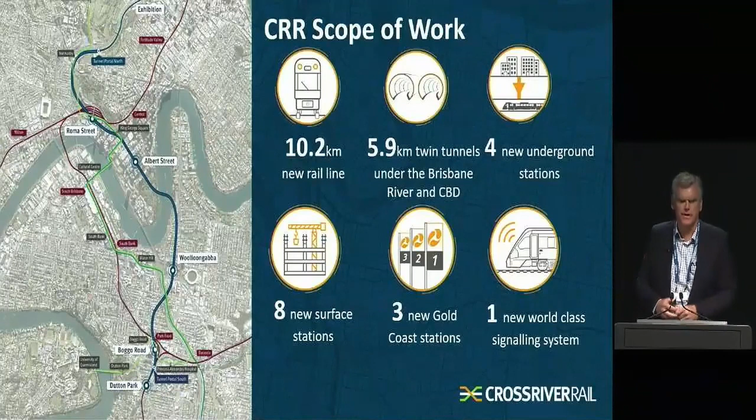Importantly, part of this work is the development of 5 precincts at Boggo Road, Woolloongabba, Albert Street, Roma Street and Exhibition. So a real uplift in opportunity across Brisbane and southeast Queensland.

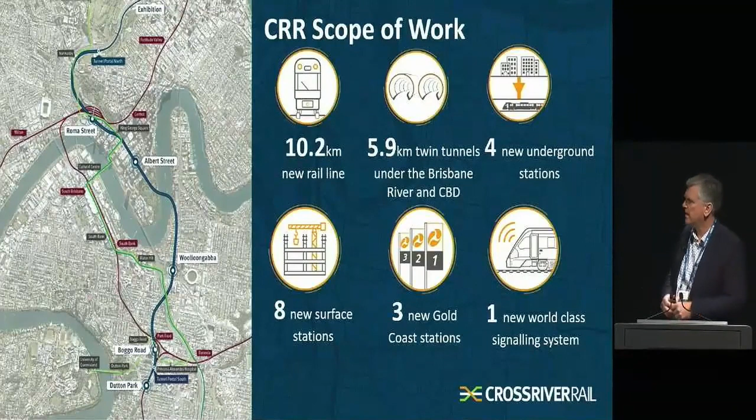On top of that, we're introducing a new world-class signalling system, the European Train Control System. All going to plan, this will be operational by 2025.

One of the things we've done is we've developed this very unique common data environment. As you know, building information modelling, as part of a standard, but what we're trying to do is improve the way that information is delivered, consumed, presented, and then integrated. So what we've done with BIM is we've built this enormous CDE.

We're now using GIS as well, which is not unusual in a project like this because you need that baseline information, you need that GIS to help. We're also looking at improving this with visualisation opportunities to make sure that we can show visually what's happening underground, what's happening above ground and what's to be delivered.

Integrating all of this, of course, is our system information and information model management work. So using all the data that's being delivered through the project for reporting purposes to really improve outcomes, whether it's on site, whether it's in a board meeting or whether it's reporting to the minister.

Underpinning all this is what we call our project DNA, our digital network approach. And what that is a commitment to deliver an operable digital twin of the infrastructure we're building. Now everyone goes, oh yeah, well, that's all happening already. It is, but this is putting the digital arteries through the heart of Brisbane.

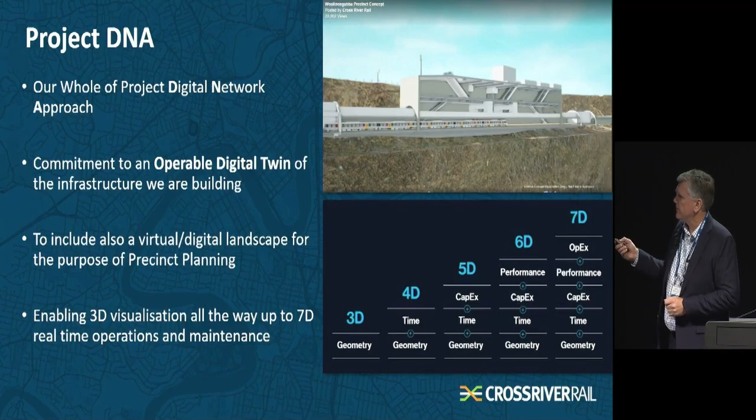We're also including visualisation around the landscape and the purpose of precinct planning to get much better outcomes for the community so they can see it in real time, but also so the operators can start to test it. And by that I mean the operators from things like Queensland Police Service, ambulance service, the rail operators and everyday commuters.

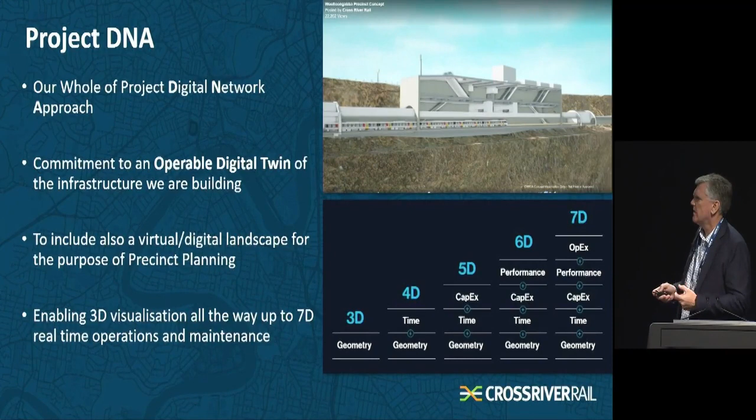But of course what we're doing with Project DNA is we're building on all this to get right up to 7D eventually, where we can integrate OPEX, which is the holy grail, I recognise that. We're at 4D, we're looking at 5D at the moment, so we've got time and cost and dollars, which is really helpful in terms of our reporting process.

A lot of the drivers of our DNA approach have come from Queensland Government positions, which you'd expect, but also the integration. We've also looked at industry best practice, and then we've built on what is happening overseas, and we're learning from those projects. We're learning from Victoria, we're learning from New South Wales, we are learning from projects like Crossrail to get that advice to then not have to create the same mistakes.

What we also did is made promises to ourselves that we want to be innovative at every step. And so we have a Chief Innovation Officer as well, who does a whole lot of great work.

What this means is that you can actually look at design review support all the way through the project. Here we've got Albert Street Station, where the station tunnel itself, the cavern, is 50 metres below ground. It's the deepest hole that has ever been dug in the heart of Brisbane.

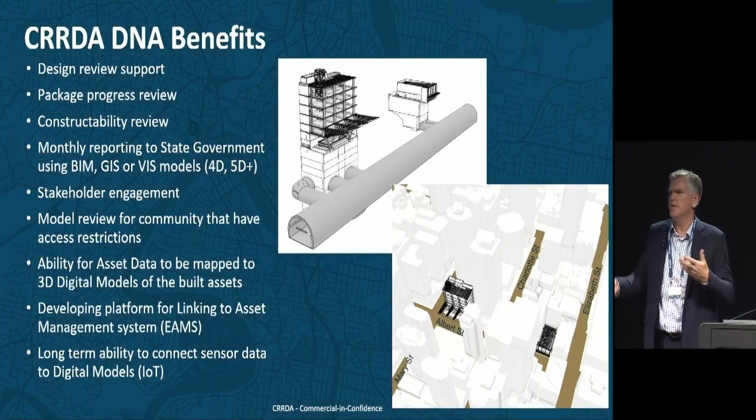It allows constructability review, of course. It allows stakeholder engagement. What it also does is it allows the ability of 3D digital models to be mapped in real time in their locations. In a moment, I'll show you the work we did tracking our tunnel boring machines through 2021, and the information we're able to get from that to get much better outcomes. It also means we can integrate that information into the Queensland Rail asset management system, their EAMS, and their long-term ability to connect sensor information for real-time monitoring.

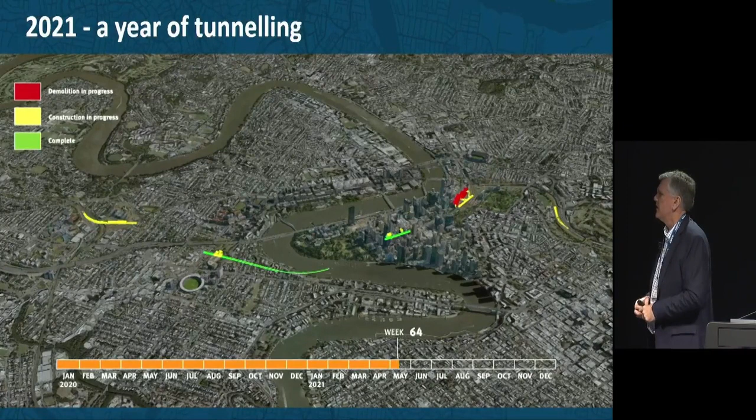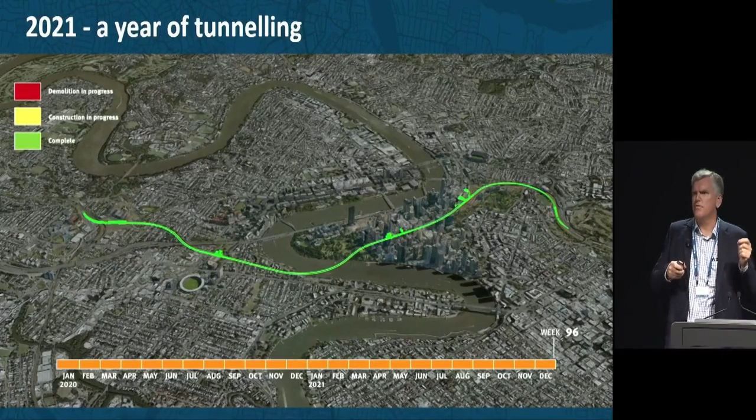This was our year of tunnelling last year. Down the bottom, you can see when we started in 2020, it wasn't until January '21 that we actually put the tunnel boring machines in the ground - they're the green lines. By the end of 2021, by December the 17th last year, all the work had been finished in the tunnelling. This was one of our most visited sites to see where the tunnel boring machines were up to on our website, so the community was engaged - people were looking at it.

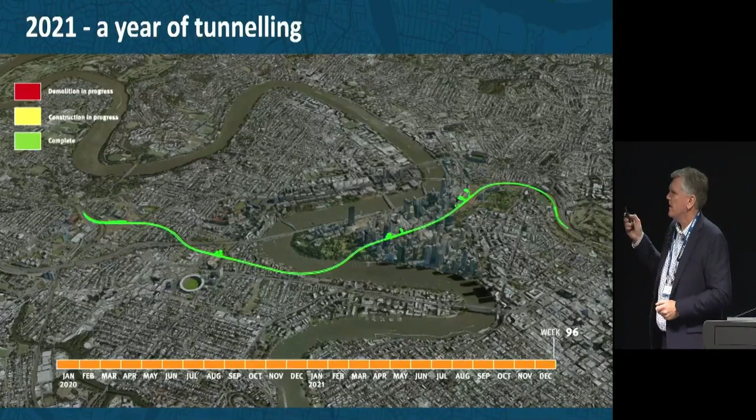This visualisation really helped. What we're also able to do, because of the telemetry involved, was develop what we called our Eureka moment. We had real-time TBM telemetry, allowing us to remodel the tunnel paths within 10mm accuracy, because it was coming from the TBMs back into our systems. This is all part of the contractual requirements, so it wasn't something we dreamt up, it was something that had to be delivered by the contractors, but it means we know that the tunnels in our models are as built.

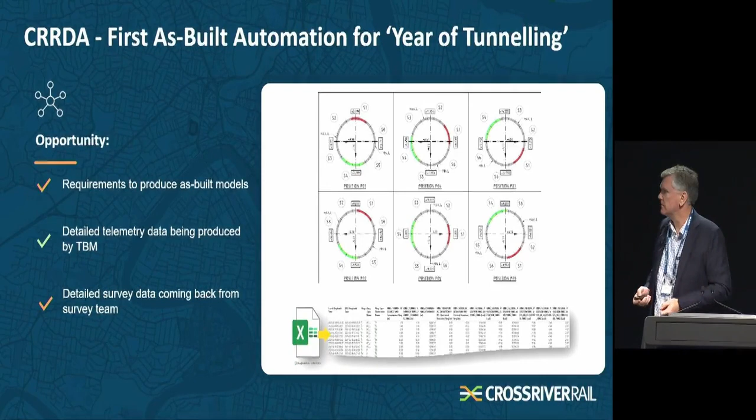And also, it becomes that first digital element of a true digital twin. So you can see that - the TBMs were consuming information at a rate of knots. They were laying in 6 segments, which created a circle. There were 4,500 circles, 27,000 separate concrete segments to create a ring for each one.

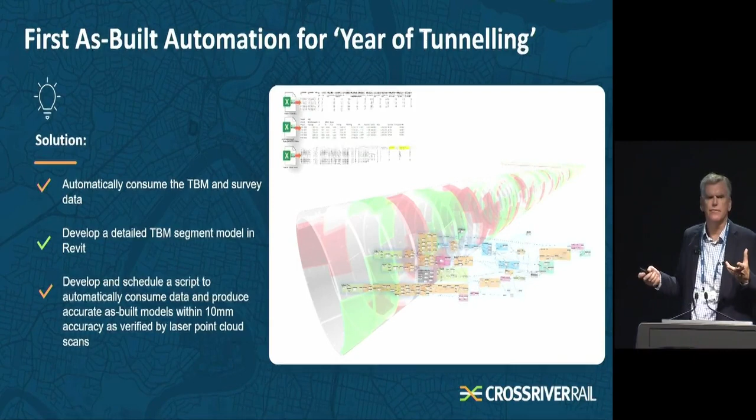This was really important because each one was separately barcoded - each segment in the ring is separately barcoded. So if at any point in the future there's a problem with a coding issue or a problem with degradation, we'll be able to know exactly where those segments were that were precast off-site, how they are, and where they're performing in the tunnel itself. Very, very rich information that we've got.

It also means we've got much more eyes on the construction integrity, not only as the tunnel was dug, but also as it was lined. This really improves outcomes around operation of the tunnels because, okay, the tunnels are lined and delivered, but they're not going to be operated till 2025. So the contractors that built them now have to maintain them till 2025 - we're in a maintenance phase for the tunnels themselves, while we're still putting in new elements into them, like overhead wiring, tracks, communications, and so on. So this is a game changer in terms of the way we're looking at maintenance and operation.

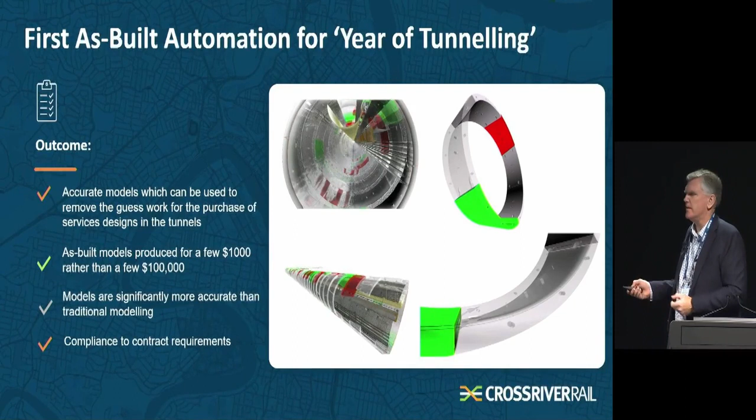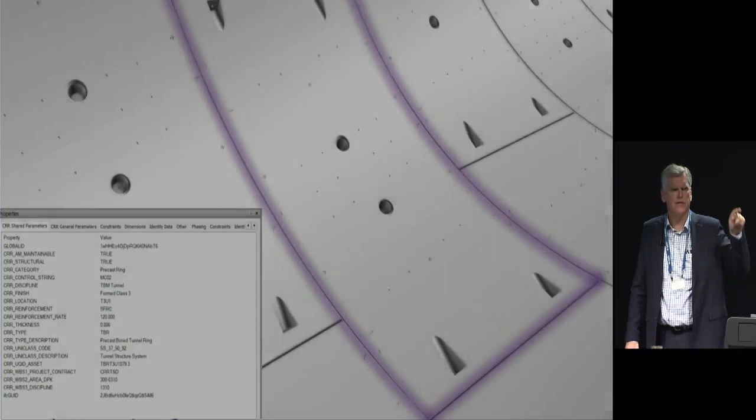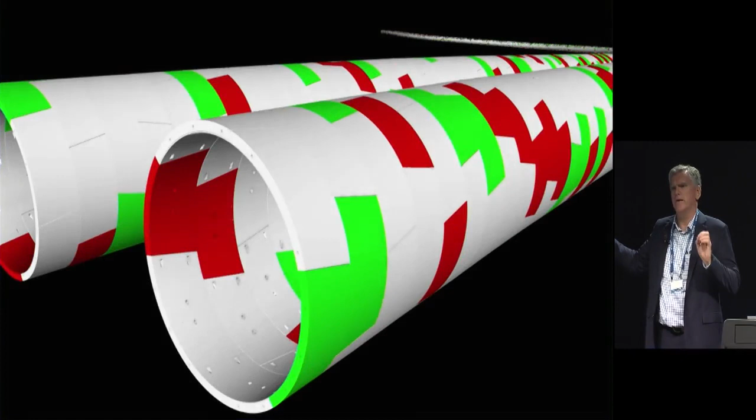But we're also using this information to help others in the future. Now this is fascinating because this shows all the segments - the red one's the finish, the green one's the start. So you can see in each segment where the first element was placed. We've got all the information about each tunnel segment - we know what the bolts are, we know where the earth anchors are. We've got this rich information which we can see and pull back in real time. We can examine it now, and we could examine it as it was going in. So this is fascinating for the project.

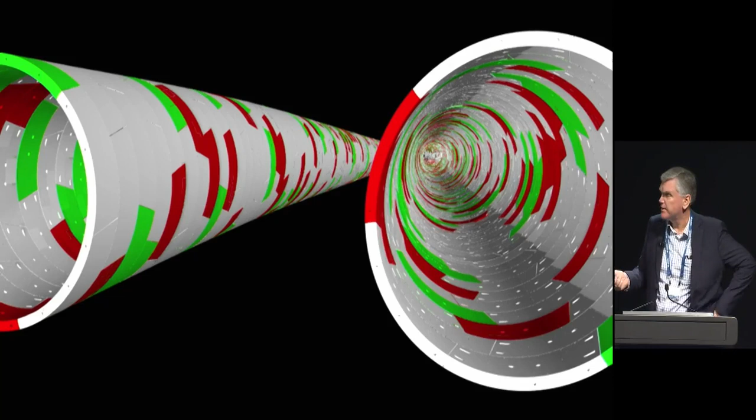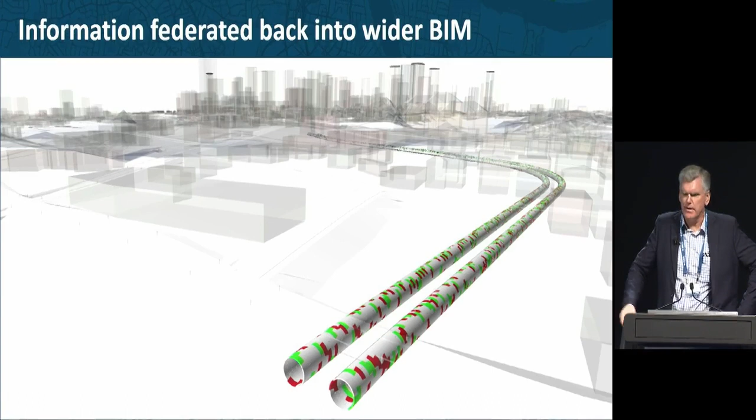So then what this showed was where the tunnels were running underground. Remember, this is the first time it's ever been built in Queensland, so this is a unique opportunity. That information was then saved back into our wider BIM model, and it will add to that ultimate digital twin for Southeast Queensland. Now, many people have seen lots of models which show lots of information, heaps and heaps of data.

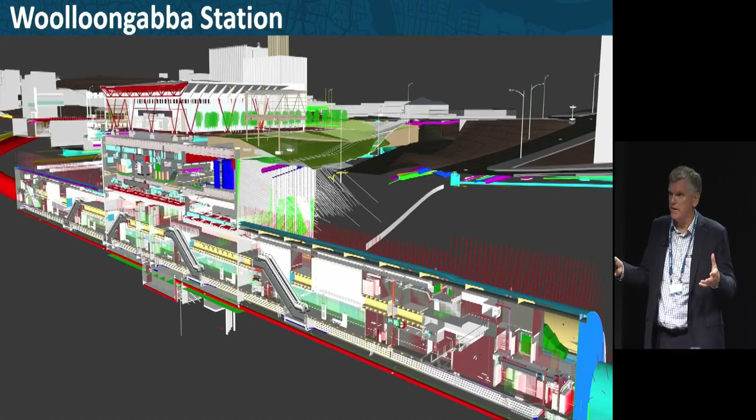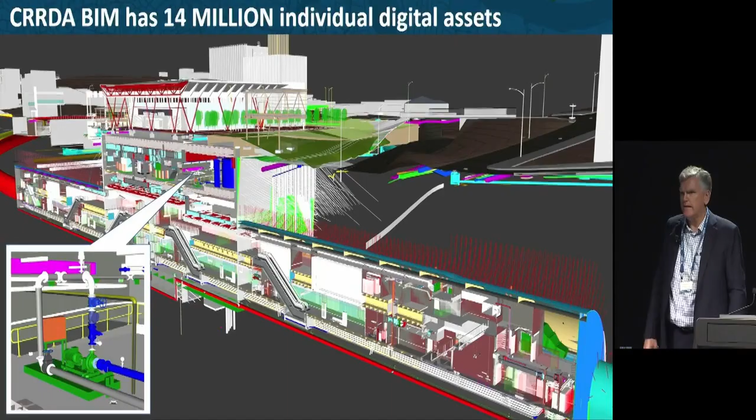This one is our Woolloongabba station. For those of you familiar with Brisbane, the Gabba station will service the new Olympic Stadium for the 2032 Olympic Games. Currently, it will service the Gabba Stadium until the redevelopment occurs in '27-'28. But I want you to focus on one room, and in that room, I want you to focus on a valve. Now, I can tell you right now that we've got 86 parameters of the 207 that are potentially available, filled with information about that valve.

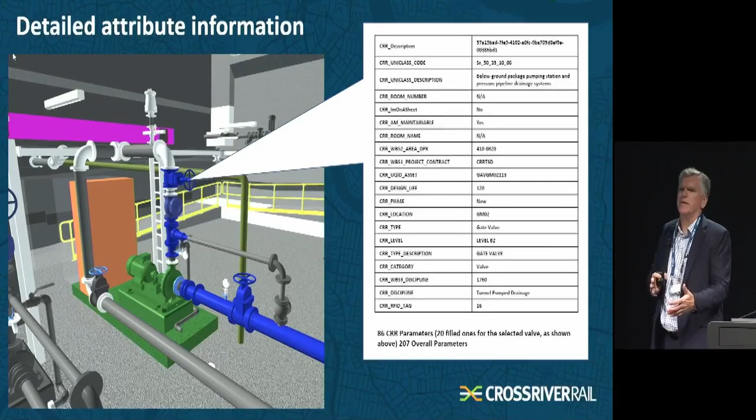Not only do we have that on that valve, we've got it on the pipes, the pumps, and all that other information. So it's a database on steroids, if you like, but you can click on those elements and find out exactly what the information is. We filled out 86. Queensland Rail can then contribute more information as it needs to over time to flesh out that detail.

We also use a bespoke GIS web map, and it means we can provide rich information along the course of the alignment of the tunnel to the community.

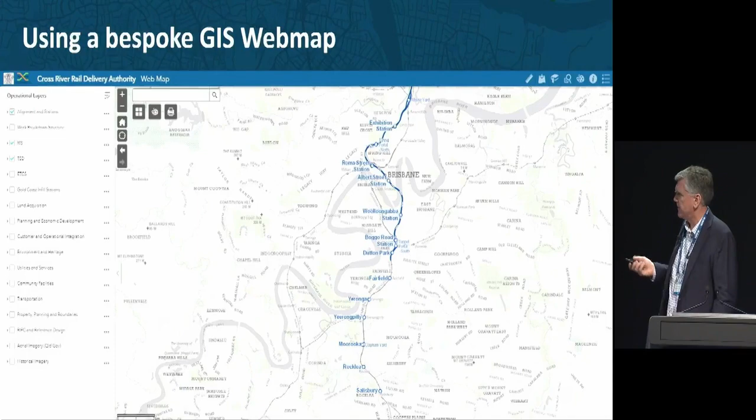This was particularly good when we started tunnel boring, when there were a number of people complaining that the tunnel boring machines were keeping them awake at night. We actually showed them the alignment of the tunnel boring machines and where they were, and they were 3 kilometres away. It was like, probably it's the possums, but it certainly isn't the tunnel boring machines, because there's no way they're coming anywhere near your place. But because of the community interest and concern, there were issues claiming the tunnel boring machines must have been doing something, and of course they weren't in that location.

This shows the impact and how we've used GIS, particularly around our environmental accreditation, site access, and walking distances, to provide lots of rich information, not only during construction but also beyond that for the community. So it's been very, very valuable and very well used.

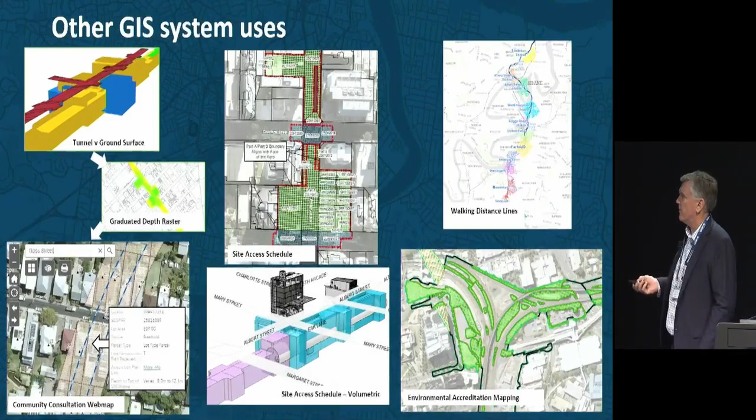Here shows some of the 3D, GIS 2D to 3D transition that we've been using, particularly around the Gabba station. We've used photogrammetry to enhance and improve the outcomes on that station, particularly what's happening above ground, but also what's developing below ground.

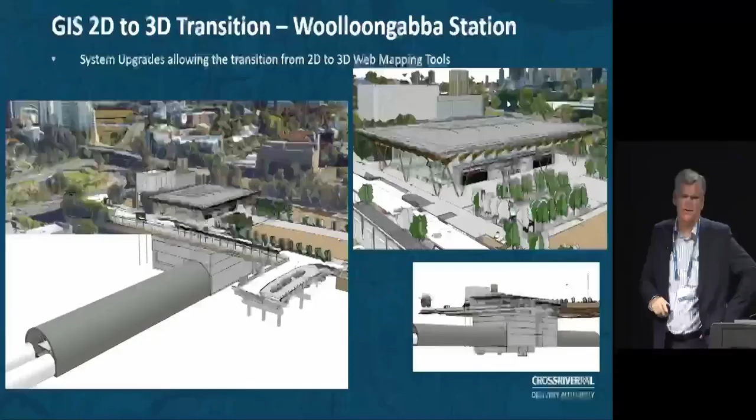Remember that below ground at the Gabba station there are 9 stories, so it's a pretty deep cavern that the station goes into, or the station box. Here we have the same information at Roma Street that we're using again to show the evolution of Roma Street and the changes that will occur for everyday commuters, for visitors, and for the sector.

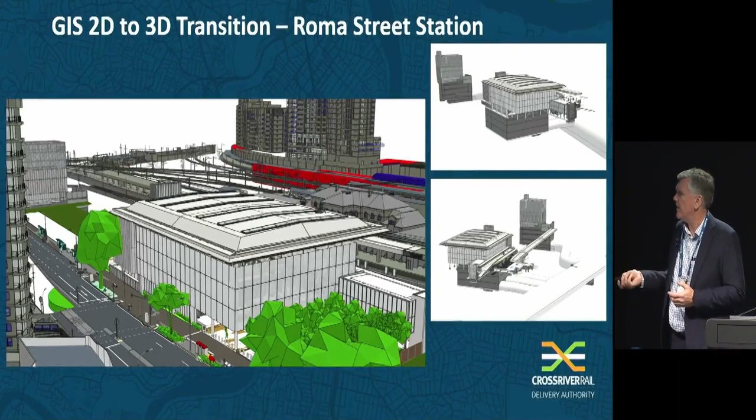We've used visualisation, and the Revizto models we've used have been excellent because we've been able to showcase those very effectively, very quickly, very easily. So if you haven't had a chance yet to go see the Revizto team, jump out at the next break and have a talk to them, because this is the sort of detail of information we've been able to generate, and I'm sure you could generate on your projects too.

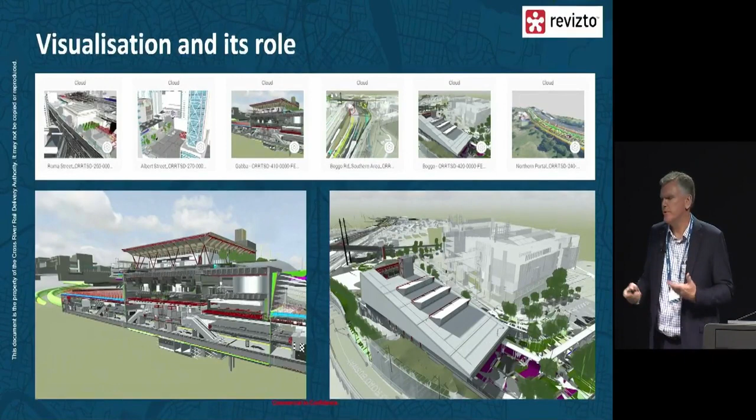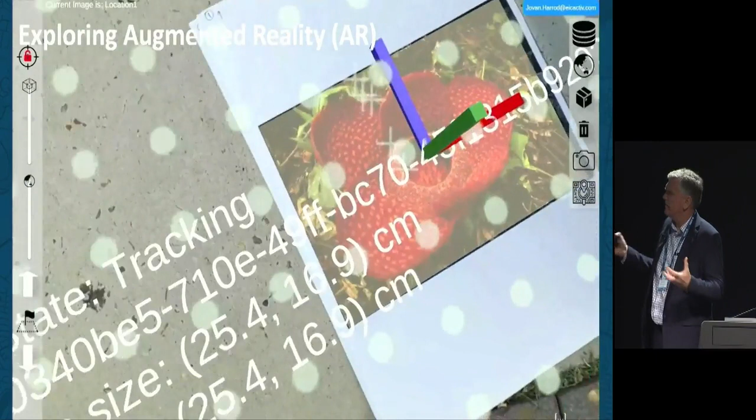Here I just wanted to show how one of our project partners has used augmented reality and the value of this. We started with a GPS location, and then we've been able to use it to show the finished work, which was a model, against what was actually delivered. So what was proposed and what was delivered. This was incredible because it suddenly showed that the accuracy we were getting was real.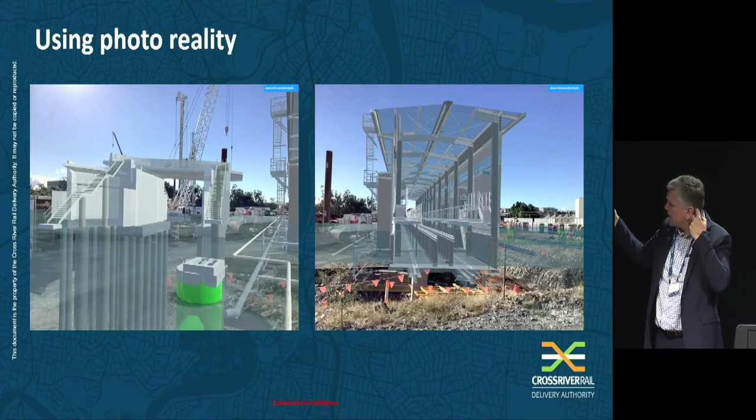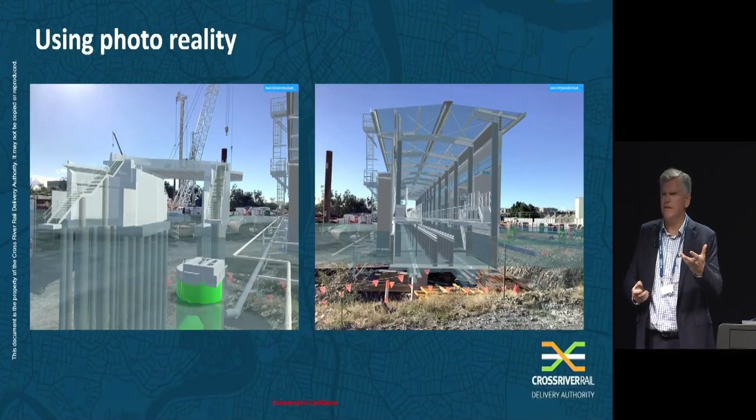That's all before it started coming out of the ground. Now, that graffiti removal shed on the right is about 3/4 complete now. So people are actually going up, standing in the location, looking at it with the visualisation, going, oh yeah, it's actually pretty good with all this stuff, isn't it? We can actually see what you've delivered.

Here we can see below ground all the earthworks, all the piping in the earthworks. Now this is absolutely critical because this becomes like dial before you dig on steroids, because we know exactly where it is. We should never, ever put a backhoe in there and pull up a line or a water course or a drainage point, because we should know exactly where it is. And if we do, it's negligent because we haven't been checking the information to confirm that it's actually in the ground. And it's in the model, right?

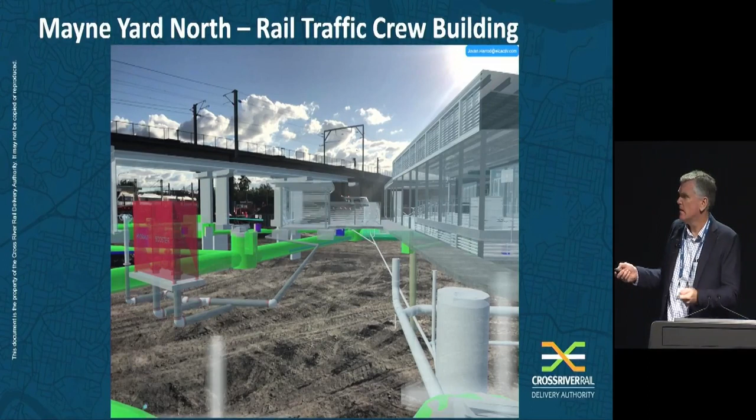So unless there are changes made in the future which are not documented and contracted to be delivered, that information will be consistent until there are enhancements provided.

Here's what Roma Street looks like currently, and this is what it's going to look like when it's finished. Showing that information has been critical, particularly to key decision makers, to the Premier, the Minister for Transport, and users, because they suddenly go, oh, we can actually see what it's going to look like. This is going to be pretty good, isn't it? Yeah, it is.

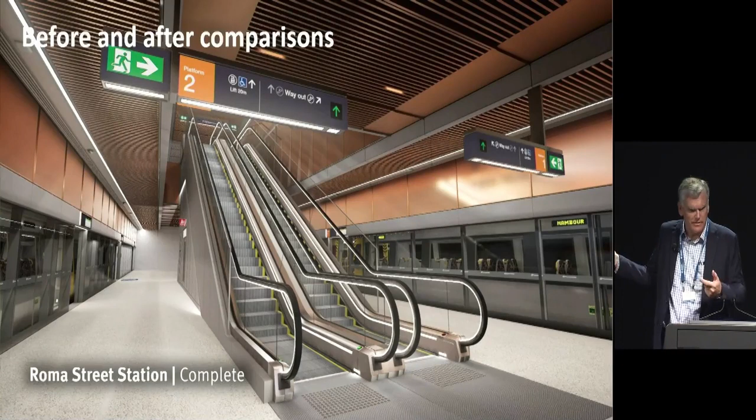It's really good. What I also want to show here is a new pedestrian and cycle bridge. The pedestrian and cycle bridge was just to show how we'd used in-house modelling to develop a pedestrian bridge across a pretty complicated site.

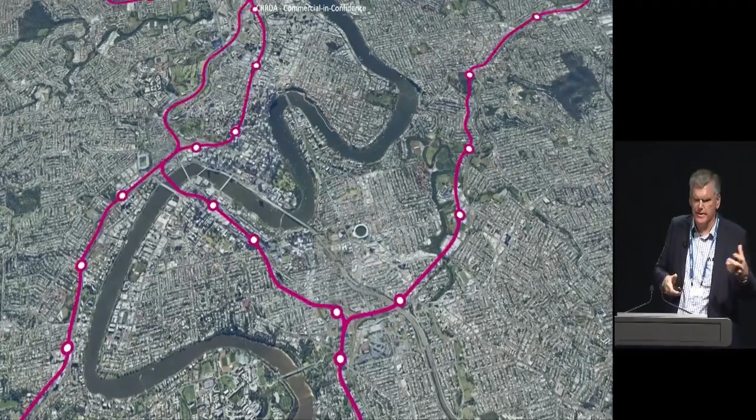This one is quite an interesting video. This combines BIM, GIS and gamification, and it really takes the whole element to the next level. I think this is where the gold is, because this shows how community engagement can really work. I'd like you to focus on Roma Street Station.

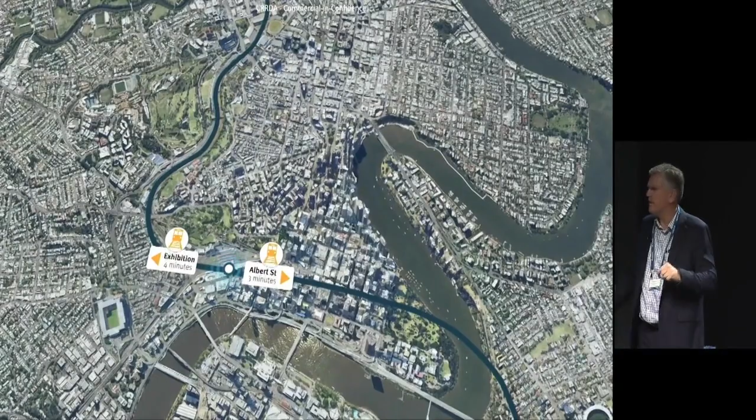It's in the heart of the city, 3 minutes to Albert Street, 4 minutes to Exhibition. You can walk into the city quite quickly, the CBD, across the Cultural Centre and around to Suncorp Stadium.

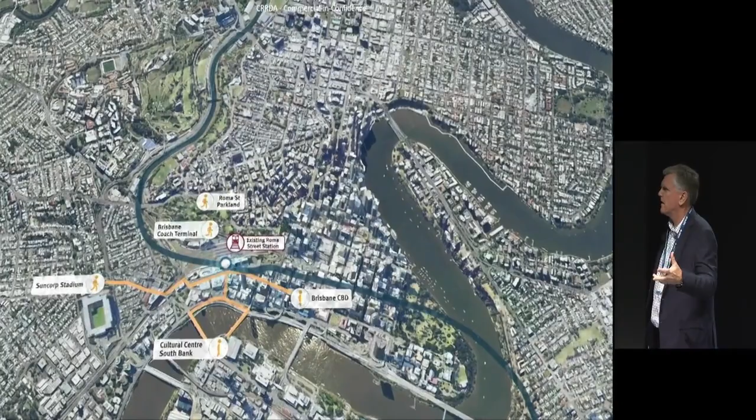We had reputedly Brisbane's ugliest building on the site, and no one raised an eyelid when this thing got pulled down, but we were able to model it to show what was there, the Brisbane Transit Centre, and what will be.

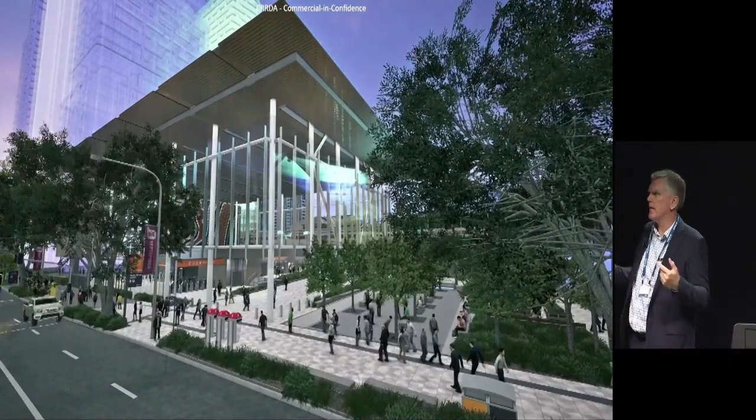And this was a game changer because people suddenly engaged and went, oh, this is actually going to be pretty special, isn't it? Look at the views that are opened up.

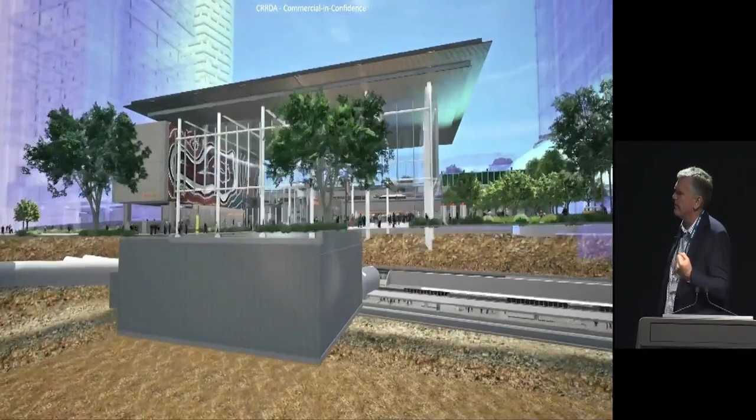Look at the connection. We also wanted to show what a journey would be like so that people could understand if they were catching the train, what would the trip look like. So we then took them below ground, brought them in from the north side of the city, and showed them just how easy it will be to get back up to the surface.

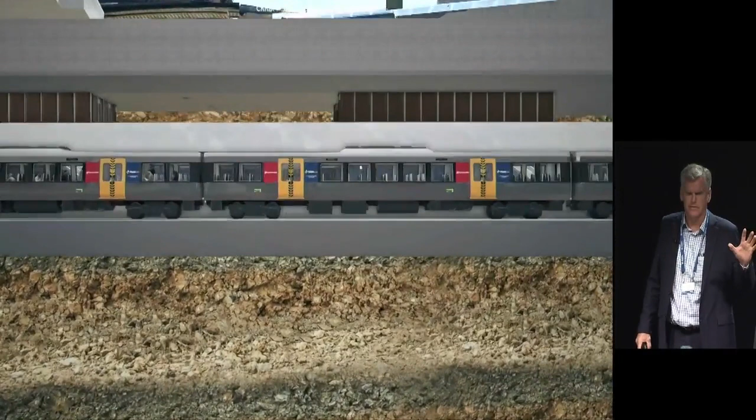Again, using it for community engagement, using it for consultation has been really, really helpful and powerful. So this is accurate, right? So this is all specified.

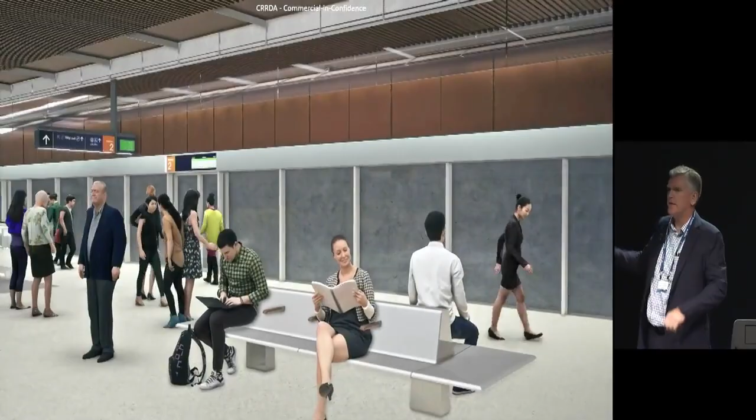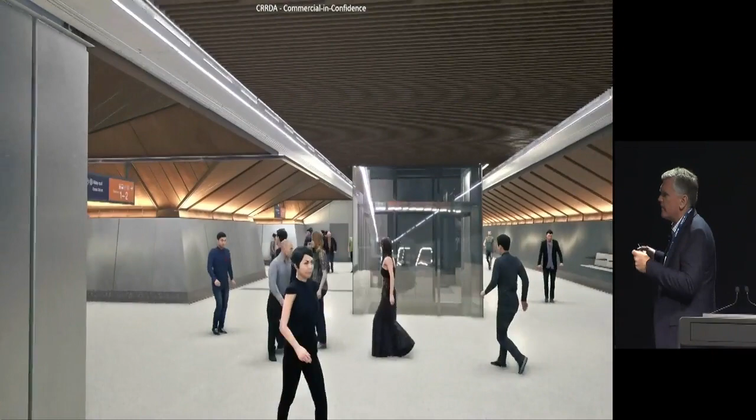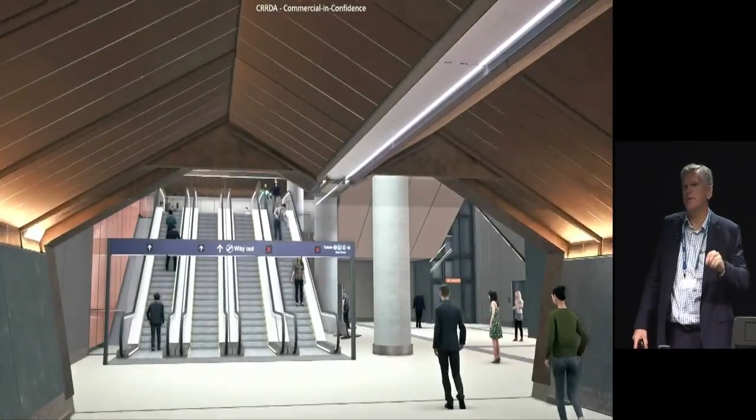This is the colour schemes, probably some of the avatars aren't quite perfect, but you know what I mean. We know how far it is below ground. We know the way that people are going to access it. We know the signage that's going to be there. We've seen the routes that people will be able to take. We've deliberately not put any nice little newspaper shops or coffee shops on the platform. They're all above ground, so we want people to get up out of the bowels and up to the surface.

So as you can see, according to our designers, by 2025 there'll be lots of nice trim people in Queensland. We've lost all the overweight people. And importantly, if you look closely, no one's looking at a phone, right? So, okay, the avatars aren't quite right, but you get the message. We're all still a bit stooped from looking at phones for months or years, but here it is.

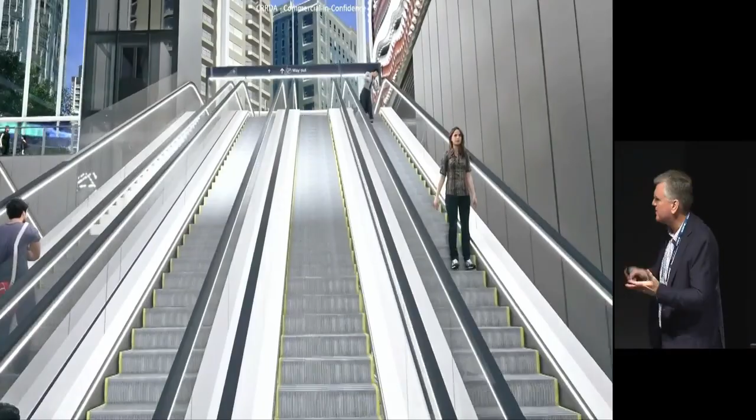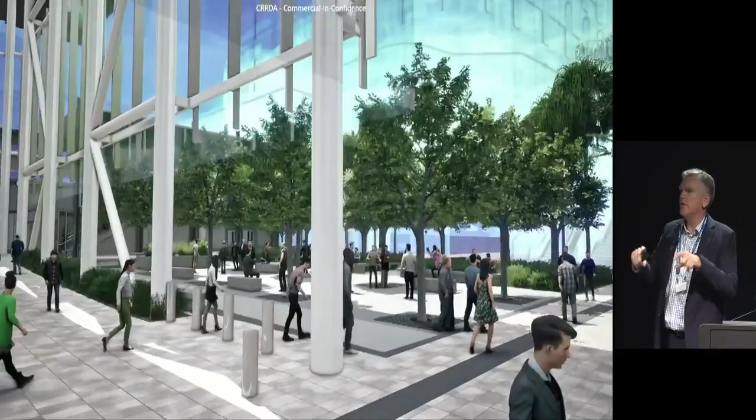So this was able to be used to showcase how the centre, or the station, will work, and then what the development opportunities are beyond this site. Because remember, we're not only doing a piece of infrastructure, we're looking at the development opportunities above. So the greyed out buildings are what are proposed, and that shows the development sector what the investment opportunities could be.

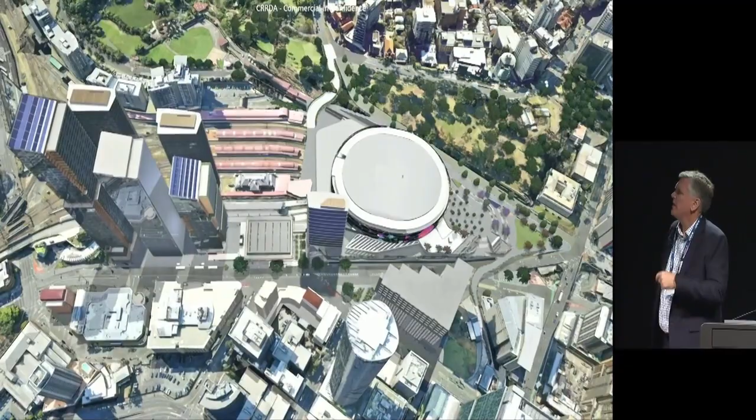So across to the right, that big dome will become known as Brisbane Live or Brisbane Arena, which will become the aquatic centre for the 2032 Olympics. Yet to be funded, yet to be built. You can also see some of the other development parcels and the opportunities in the heart of the city.

So it's going to change the way that the city will work because it will drag opportunities to what we call the western end of the city. So where does this all lead us? This leads us to a spatially enabled digital twin for Queensland, for SEQ.

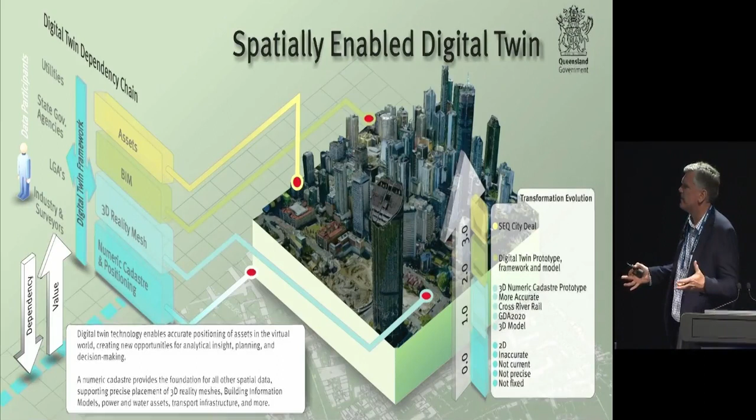What we're looking at is using the SEQ City deal that was recently finalised and signed, the digital twin prototype, the GIS base that we've got underneath it, and of course looking to leverage opportunities with all the information that's coming. But you've got to have a good base on which to do that.

So Cross-River Rail is playing its part. So what does the future hold for us? Well, we think that it'll be very exciting, very interesting, and it will help give us an opportunity to build digital models for operations, because that's where the gold is. That's where the costs are.

At the moment, certainly in Queensland, and I'm sure in every other jurisdiction across Australia, treasuries and finance departments focus on the capital cost, and they kick the OPEX cost out because once you build it, you'll fund it. But over the life cycle, what we're trying to do is demonstrate the value and look at the overall costings over the life cycle of the asset.

We're developing opportunities, of course, with other stakeholders, so Queensland Rail, Department of Transport and Main Roads, Department of Resources and 3D Cadastre, but also supporting the 2032 Olympics.

The 2032 Olympics are going to be the best ever. Every Olympics is the best ever. But what the head of the IOC has said is we want to make sure that it's digitally enabled. So they're going to sell tickets virtually, so you can have a seat in a stadium that might be sold a dozen times over, so you can watch events. You don't actually have to be in the stadium. You'll be able to pick your seat in the stadium to watch an event. So think about the monetary opportunities there as well.